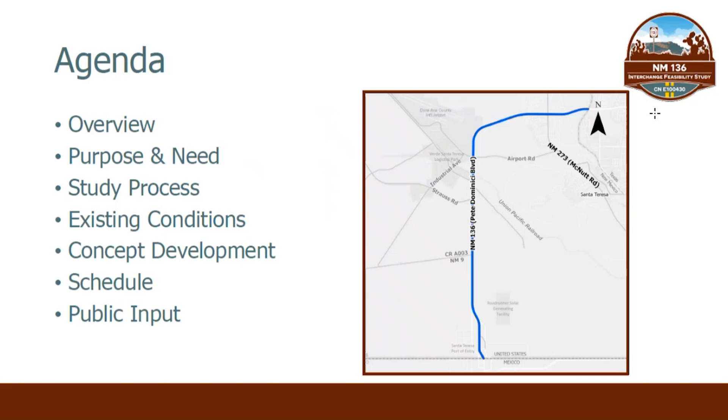Through the presentation, I will walk you through an overview of the project, including purpose and need, specifics on the study process, present the existing conditions, discuss the alternatives analysis, review the project schedule, and finish up by letting you know how to provide public input.

The entire project is to conduct a Phase 1AB study of New Mexico 136 from milepost 0 to milepost 9.2, or from the port of entry at the international border of Mexico and the United States to the Texas-New Mexico border. The official title is the New Mexico 136 Interchange Feasibility Study. New Mexico 136 is a 4-lane arterial that facilitates both international and interstate commerce and drives economic development in Doña Ana County and the state overall.

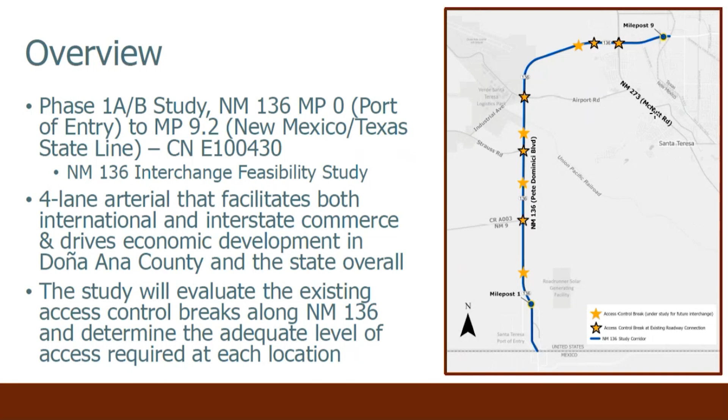The study will evaluate the existing access control breaks along New Mexico 136 and determine the adequate level of access at each location. The project is aware of and considering the following adjacent studies: the Santa Teresa Port of Entry Expansion, New Mexico Border Authority; Sunland Park Port of Entry Planning, City of Sunland Park; Border Highway Connector Study, a new roadway corridor between New Mexico 136 to New Mexico 273, New Mexico Department of Transportation; Santa Teresa Strategic Plan and Economic Impact Analysis, New Mexico Economic Development Department; and the Industrial Bridge Overpass over the Union Pacific Railroad by Doña Ana County. Also, the future Roadway Network Resiliency Plan by Doña Ana County.

Through the study process, the project purpose and need will be determined from the following categories: physical deficiencies, safety, travel demand and congestion, mobility, system connectivity, economic development, legislative mandate. The purpose is to improve operational and safety issues, increase mobility, and enhance economic development. Need is to determine the level of access required to create a free-flow freight corridor along New Mexico 136 from the Santa Teresa Port of Entry to Interstate 10.

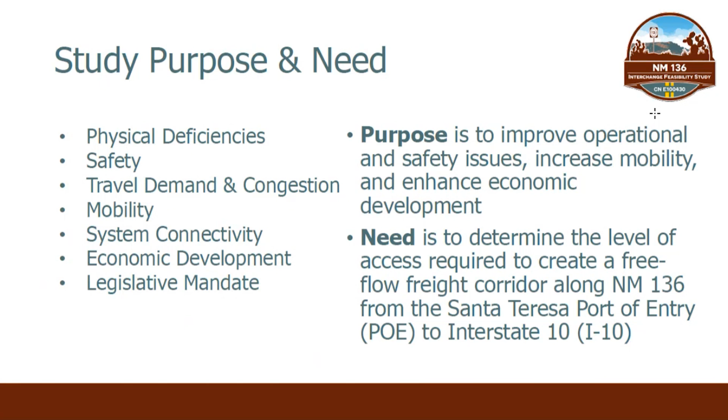The study process will follow the New Mexico Department of Transportation location study procedures. Currently, we are in the Phase A portion of the study, which is defined as the initial evaluation of alternatives. The next phase, Phase B, will be the detailed evaluation of alternatives. The study will be conducted as a combined Phase A-B study and will incorporate the criteria of each phase into the study. The future phases will be environmental documentation, Phase C, and Phase D preliminary design, and finally, final design and construction.

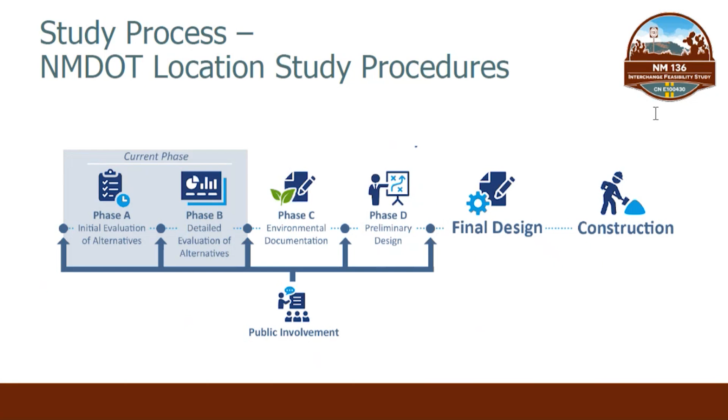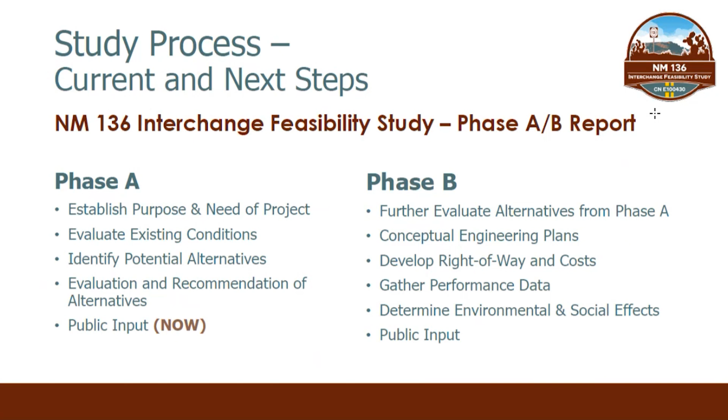The study process for the New Mexico 136 Interchange Feasibility Study is a combined Phase A-B report. Phase A will include establishing purpose and need of the project, evaluating existing conditions, identifying potential alternatives, evaluation and recommendation of alternatives, and public input. That's why we're here now, for the public input. The Phase B portion of the report will include further evaluating alternatives from Phase A, concept engineering plans, developing right-of-way and cost, gathering performance data, and determining environmental and social effects. Public input will also be included in Phase B.

The next steps in the study process will be Phase C, environmental through the National Environmental Policy Act and categorical exclusion; Phase D, preliminary design, to include 30% engineering plans; and Phase 2, final design services.

Please join me now for a review of the existing conditions of the project area. New Mexico 136, Pete Domenici Highway, begins at the U.S.-Mexico border and extends 9.2 miles to the New Mexico-Texas state line. New Mexico 136 is an access-controlled facility, beginning at approximately milepost 0.43 at Binational Drive. The existing roadway typical section is a 4-lane divided highway with existing right-of-way 200 feet wide. In 2015, the pavement section along this roadway corridor was upgraded with a 9.5-inch continuously reinforced concrete pavement.

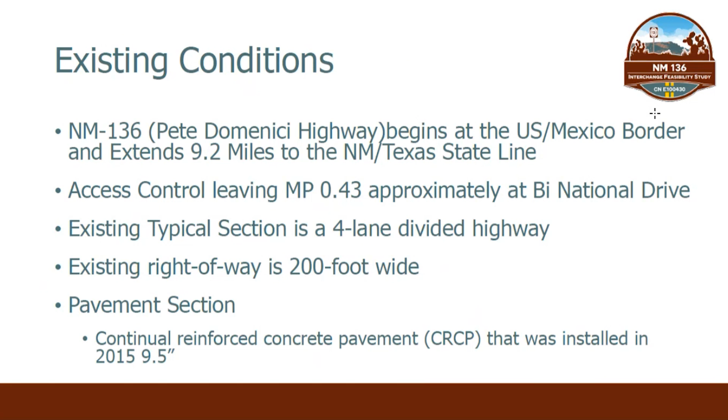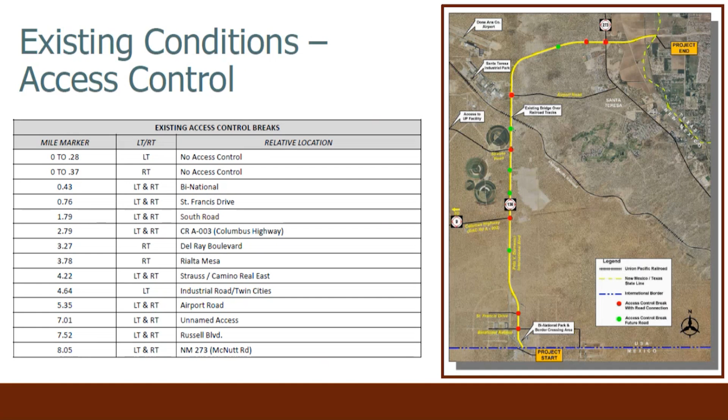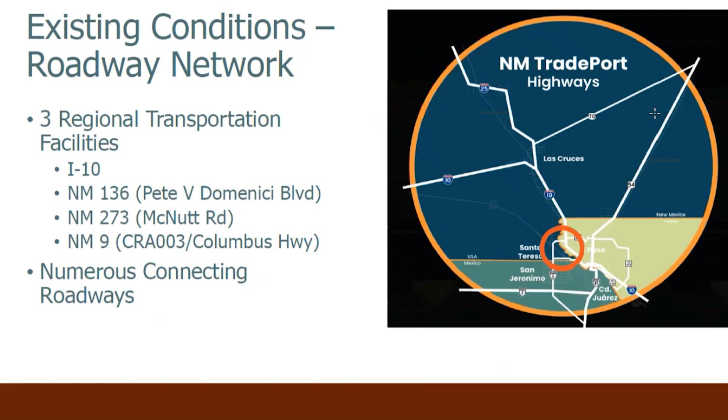Existing access control along New Mexico 136 is displayed on the map to the right and defined tabularly on the left. The red dots on the map indicate access control breaks with existing road connections, and the green indicate the access control breaks for future roads. In review of the existing comprehensive plans and development plans, the existing land uses through the corridor are mixed commercial, industrial, residential, and undeveloped. The existing roadway network consists of regional transportation facilities: I-10, New Mexico 136, New Mexico 273, New Mexico 9, connecting numerous roadways throughout the region.

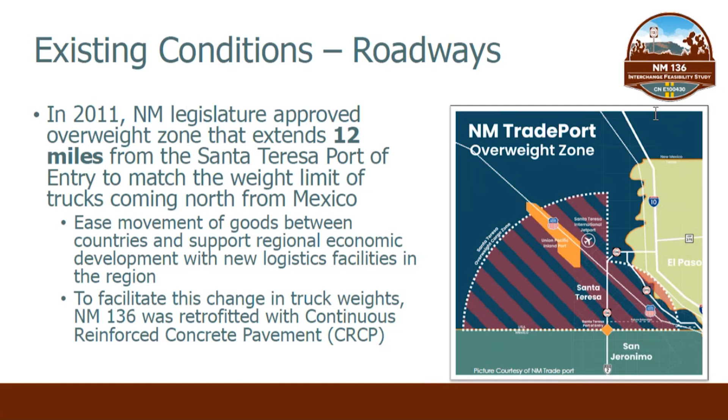In 2011, the New Mexico legislature approved overweight zones that extend 12 miles from the Santa Teresa port of entry to match the overweight limit of trucks coming north from Mexico. The goal was to ease movement of goods between countries and support regional economic development with new logistics facilities in the region. To facilitate this change in truck weights, New Mexico 136 was retrofitted with continuously reinforced concrete pavement.

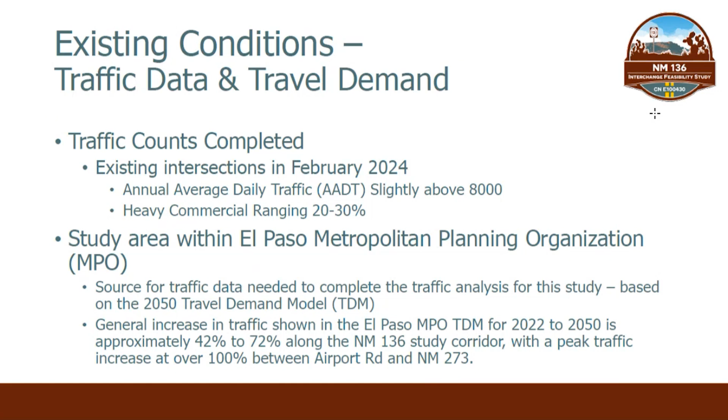In February of 2024, traffic counts were completed to determine the existing level of service for the corridor. Annual average daily traffic is slightly above 8,000 vehicles per day. Heavy commercial is ranging from 20 to 30%. The study area is within the boundary of the El Paso Metropolitan Planning Organization, or MPO. Our team will be coordinating with El Paso MPO on the 2050 demand model to project future traffic information.

Traffic counts were completed at intersections in 2024. The existing signalized intersections included Strauss at New Mexico 136, Airport at New Mexico 136, Russell Boulevard at New Mexico 136, and New Mexico 273 at New Mexico 136. Existing signalized intersections operate at overall level of service C or better. New Mexico 136 and New Mexico 273 operate at an overall level of service C.

However, individual movements, northbound left, right, and southbound left, operate at a level of service E in the AM, midday, and PM peak. New Mexico 136 and Russell Boulevard operate at an overall level of service C. Individual movement operations experience breakdown in the AM peak hours, where the northbound through operates at a level of service E, with the northbound through and southbound left running over capacity during this time. All other movements operate at a level of service D or better.

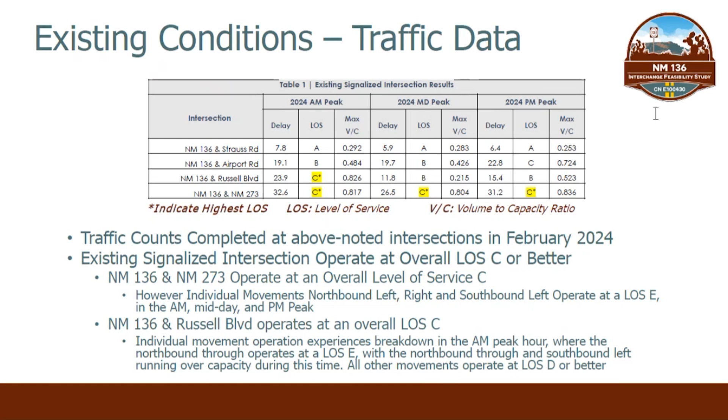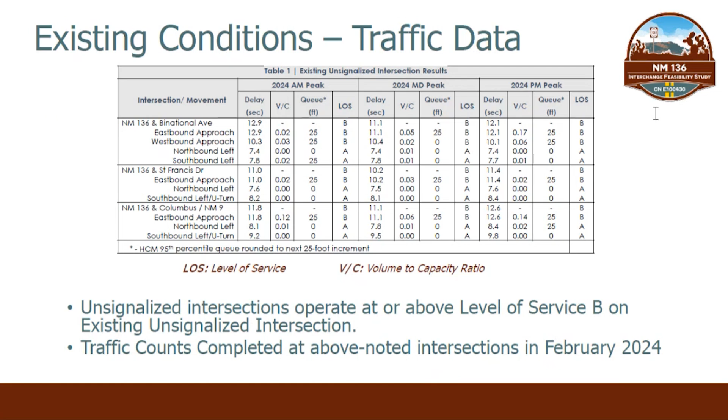Unsignalized intersections operate at a level of service B or better based on the traffic counts gathered in February of this year. Through the study process, we have reviewed 4-year crash history reports of 150 total. The majority of the accidents are at intersections. 72 are same direction crashes, indicating rear end or angle resulting in property damage only. 1 fatal crash involving impaired driving was noted through the corridor.

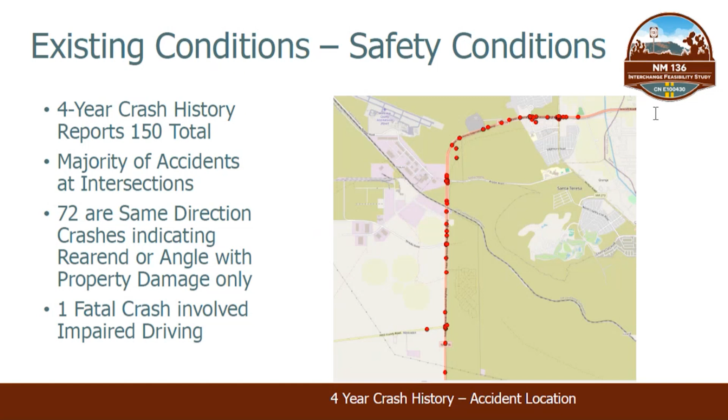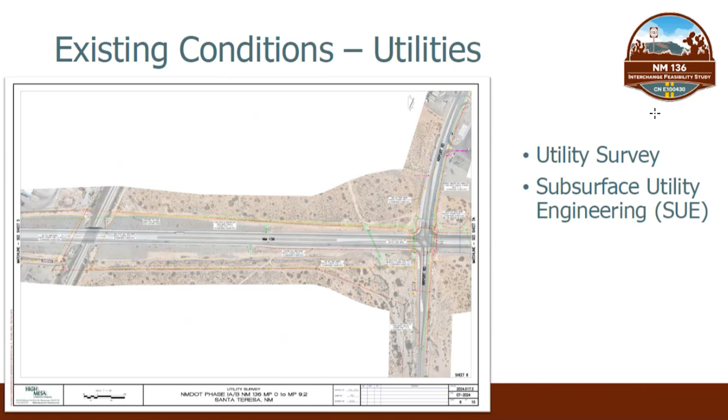As part of the study process, we have performed subsurface utility engineering and survey to identify any potential impacts with the alternatives assessment. The project will continue to coordinate with utility owners for the life of the project. All alternatives will be reviewed with existing and future utilities in consideration.

The existing railroad crossing is over the Union Pacific Railroad via bridge between Airport and Strauss Road. Through the study, the team will review and document load-bearing capacity for this bridge. The existing bridge will be studied for alternatives to increase bridge capacity from 86,400 to 96,000 to meet the overweight corridor designation.

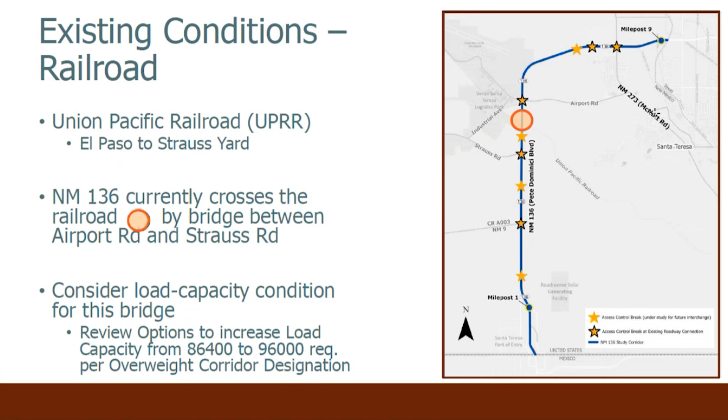Existing economic conditions. The entirety of Doña Ana County is a foreign trade zone, the only county-wide foreign trade zone in the United States, which includes the Borderplex, the largest metropolitan area on the U.S.-Mexico border, which includes Las Cruces, New Mexico, El Paso, Texas, and Mexico, serving a population of more than 2.5 million.

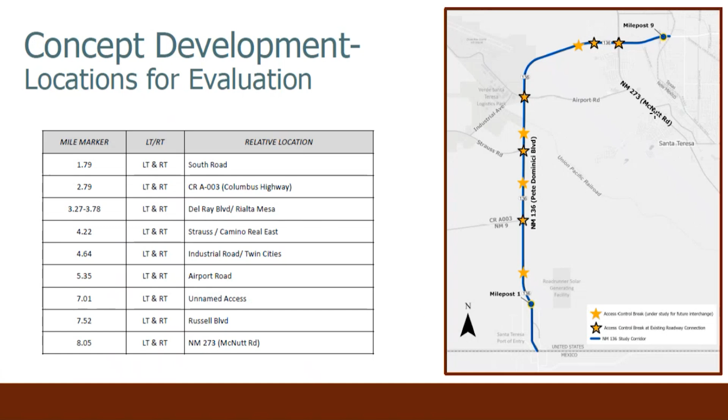Now we will get into the development of initial concepts. The concept developments and locations for evaluation will range from mile marker 1.79 at South Road all the way through mile marker 8.05 at New Mexico 273, to include 9 locations for evaluation. The existing intersections along New Mexico 136 are currently at-grade intersections, meaning all traffic travels through the intersections at the same elevation. Some of these intersections, like New Mexico 273, Russell Boulevard and Airport Road, are signalized intersections. Others are stop controlled on the crossing roadway through a stop sign.

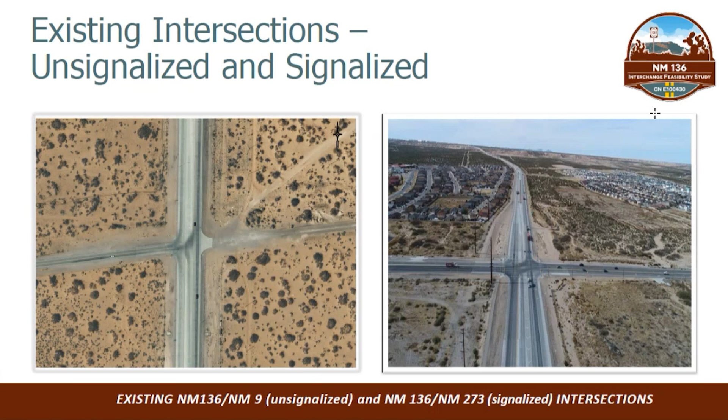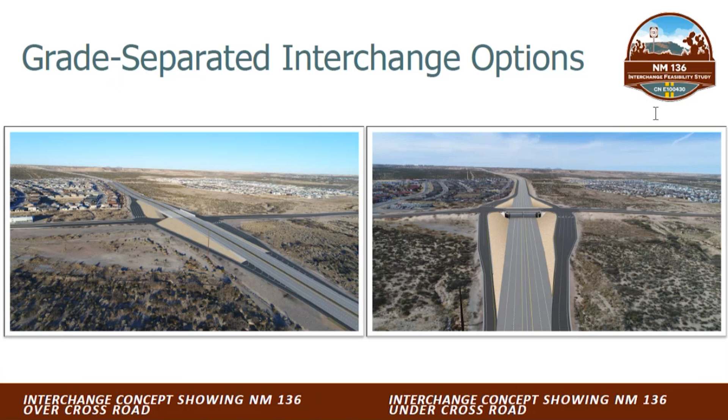The existing typical roadway section for New Mexico 136 is a 12-foot lane divided highway. The median width is 24 feet, with inside shoulder widths of 4 feet and outside shoulders measuring 8 feet. Connections to New Mexico 136 are only made at existing access control locations.

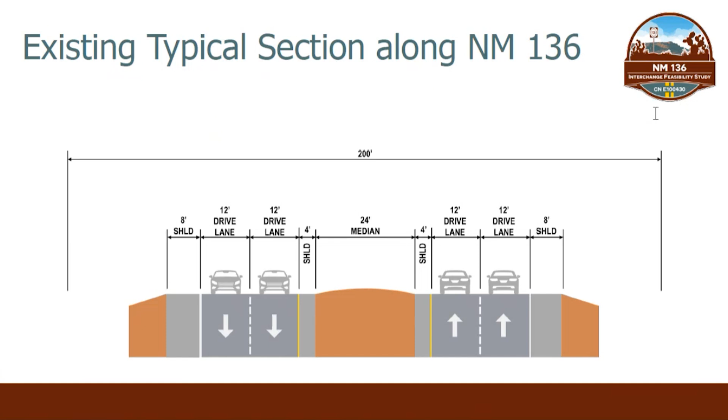With the development of grade-separated interchanges at the approved crossroads, adjacent roadway systems and connections will need to be considered. Connectivity between interchanges can be accomplished by different methods: internal roadways, built within the development connecting to major crossroads, and adjacent roadways, which travel adjacent to New Mexico 136. Both options could include single direction or bidirectional travel. All options could be phased to be constructed as developments arise.

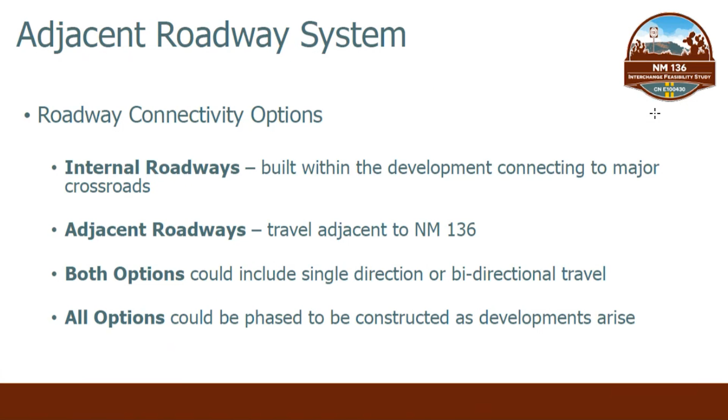Evaluation criteria for the concepts will include purpose and need, traffic operations, safety, future land use, environmental impacts, utility impacts, right-of-way acquisition, engineering and construction, cost, and public input.

The New Mexico 136 Interchange Feasibility Study timeline began in the winter of 2023-2024, beginning with survey, mapping, and review of the existing conditions. Through the summer and fall of 2024, we will be developing interchange alternatives and presenting the existing condition findings to the public through stakeholder and public meetings. Through the winter of 24-25, we will be working through the detailed alternatives and preferred options will be selected.

In the spring of 2025, we will submit the draft Phase A/B report, followed by a second public meeting where we will present the findings from the study process. Through the fall and winter of 2025, we will be completing the study and releasing the final Phase A/B report.

Your input helps make better decisions on future transportation projects. The goal of the presentation is to establish and maintain consistent flow and exchange of information. We have a project website and we'll be leaving you with our contact information. Please submit all comments by November 1st, 2024.